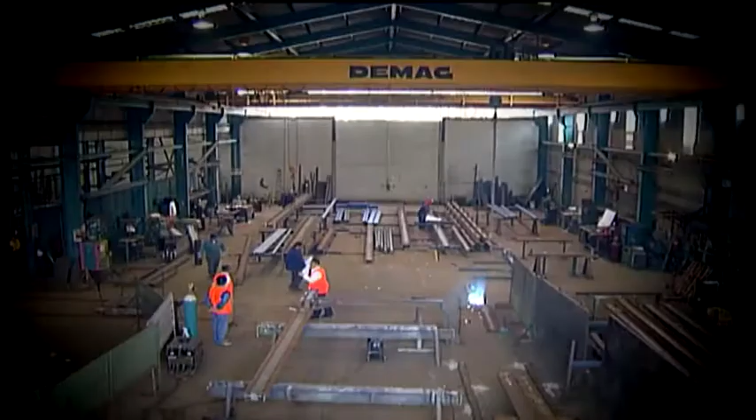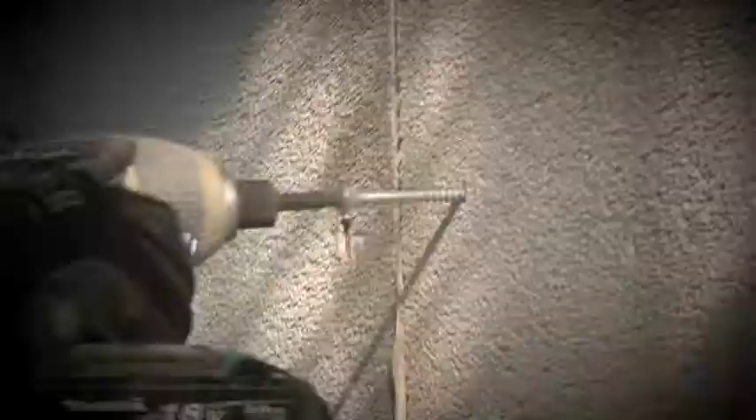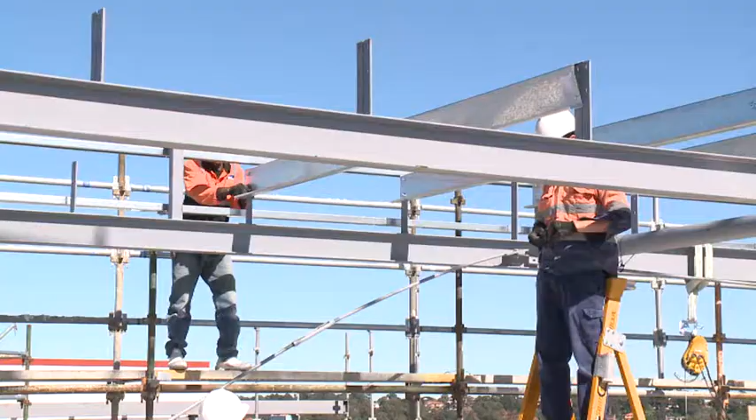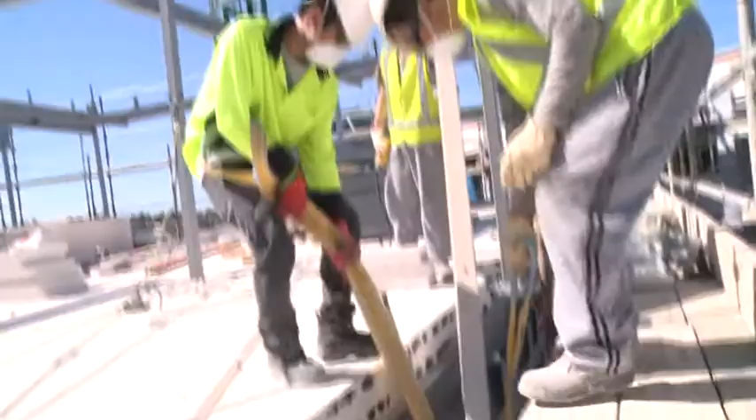The patented Merhes building system comprises a method of construction using a prefabricated structural steel framework with preformed autoclaved aerated concrete panels supported contiguously to form the structural floor and wall between supporting steel frame elements in a building.

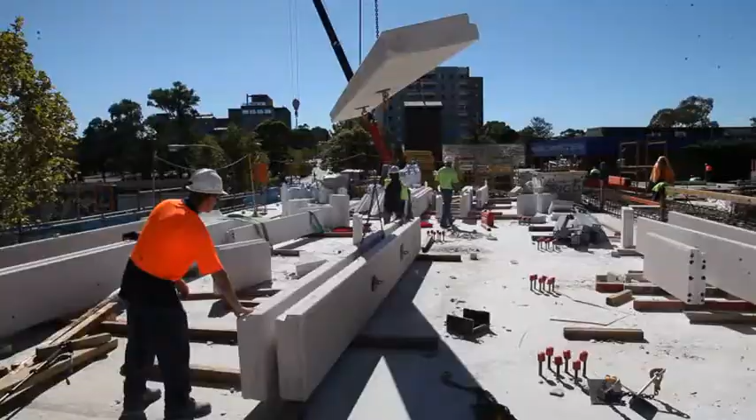The panels are delivered to site with preformed lifting holes to enable secure crane lifting singularly or in multiple panels in series by means of the respective lifting holes to enable simultaneous lifting of up to 5 panels.

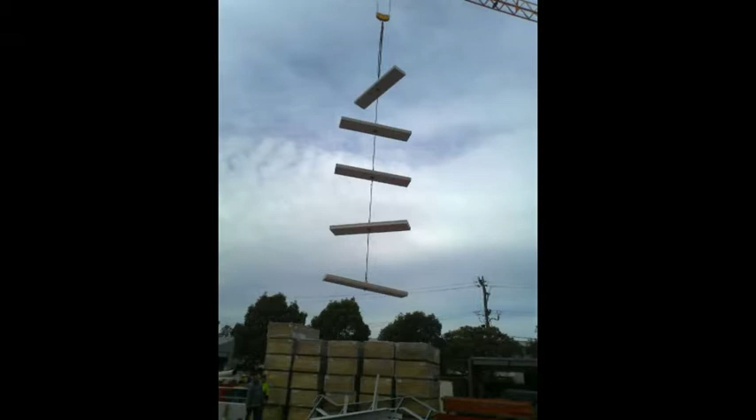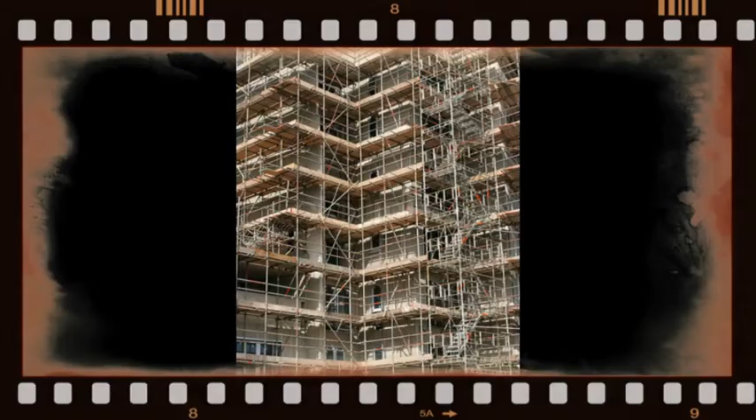Contemporary multi-level construction typically involves the construction of a reinforced concrete structural core formed with the floors cast level by level, followed by erection of external walls tied into the structure.

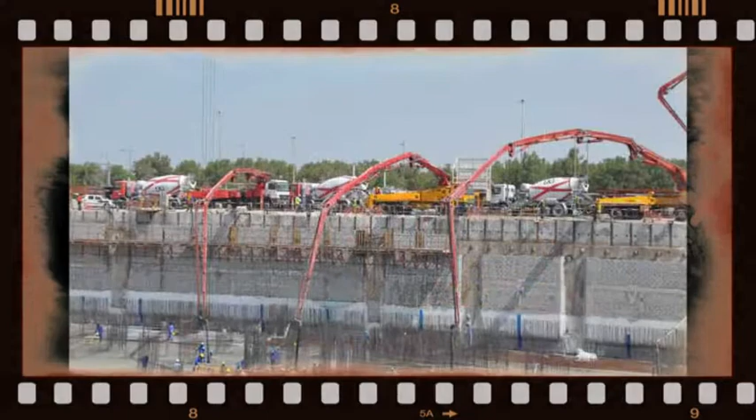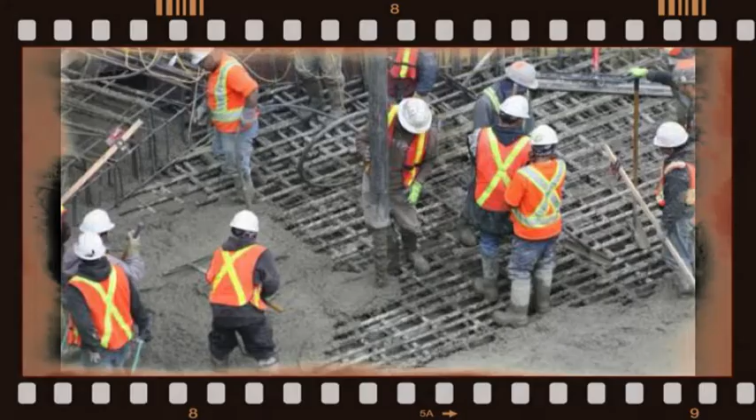The process for constructing these concrete elements involves the fabrication of a complex formwork system, the placement of reinforcing bars with associated support props before the concrete is pumped and placed into each section and is allowed to cure until it gains sufficient strength. The formwork and props must then be removed before the internal elements and finishing works can proceed. This method of construction has proven to suffer from a number of significant and inherent disadvantages.

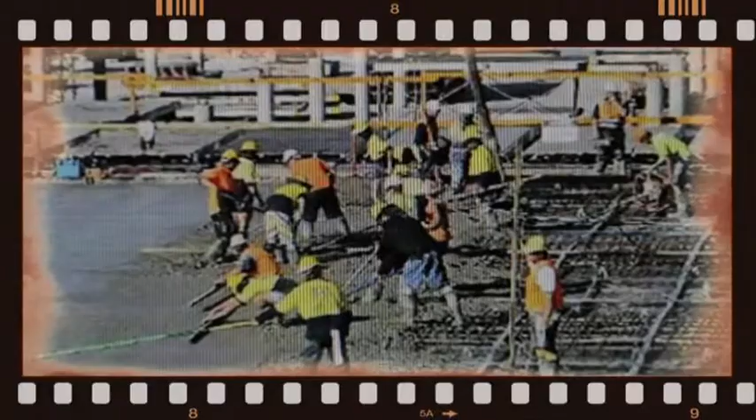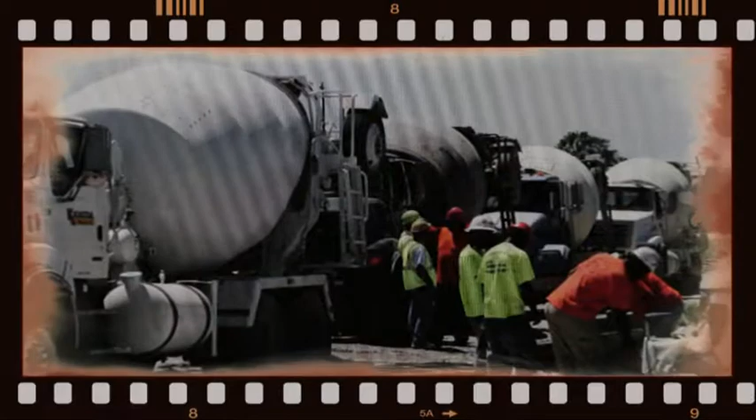Firstly, a large number of separate trades are required to implement the highly labour-intensive process that must be carefully coordinated. The overall process is inherently slow. In the context of a high-rise building development, the cumulative time required can amount to many months, at an economic cost of many millions of dollars for a single construction project to both the builder and developer.

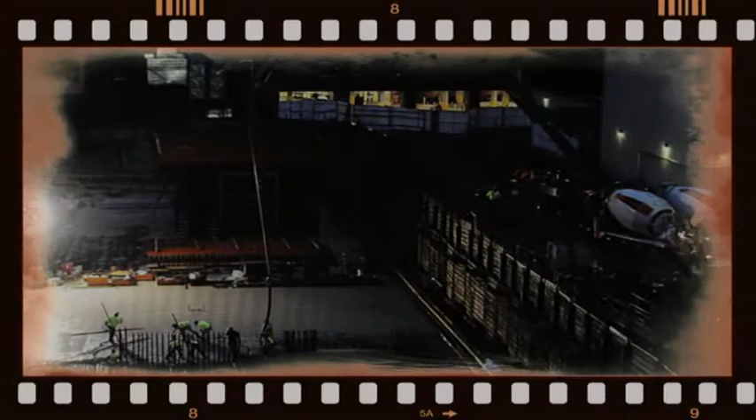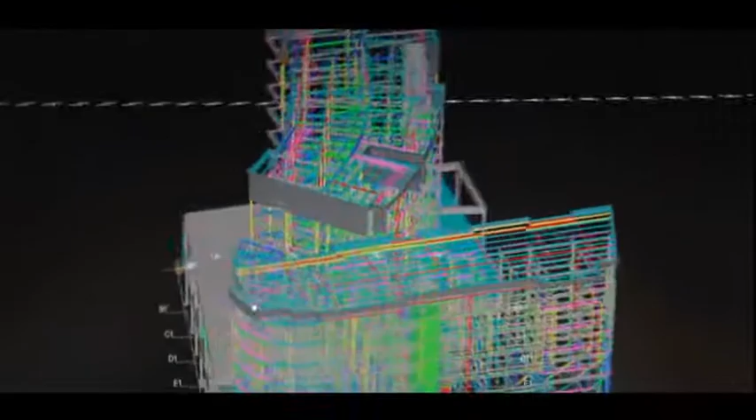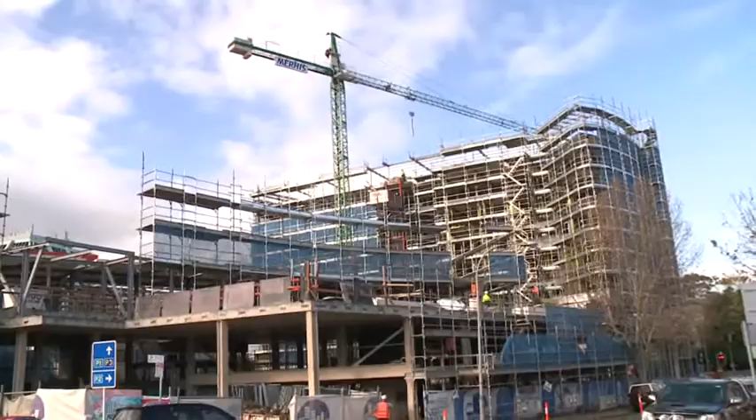The Merhis building system is primarily devised to overcome and substantially ameliorate the deficiencies of the traditional method of construction and to provide an alternative form of construction for multi-level residential apartment buildings, retail shopping complexes, hotels, high-rise office blocks, schools, hospitals, and other forms of commercial and industrial complexes.

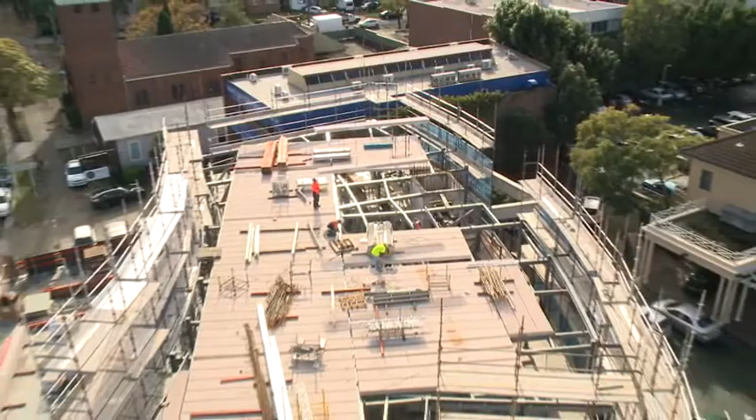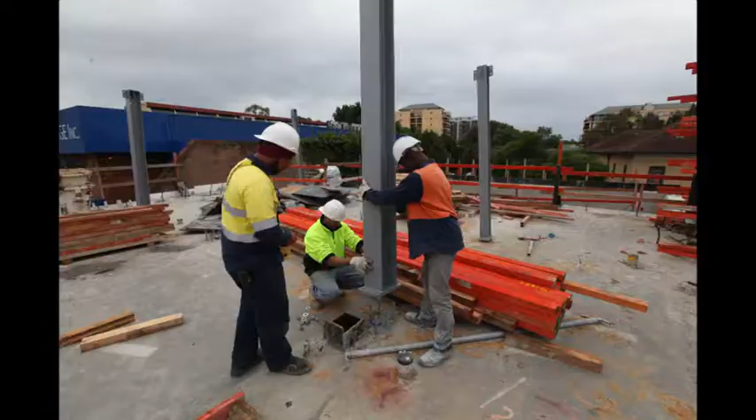It comprises a method of constructing a building by: 1. Erecting a series of vertical and horizontal support steel columns and beams that are bolted, welded or otherwise fastened together, either on site or delivered to site as a prefabricated structural subassembly. 2. Positioning prefabricated structural panels comprised of a reinforced autoclaved aerated concrete material that are placed in a side-by-side relationship to form a structural floor and wall.

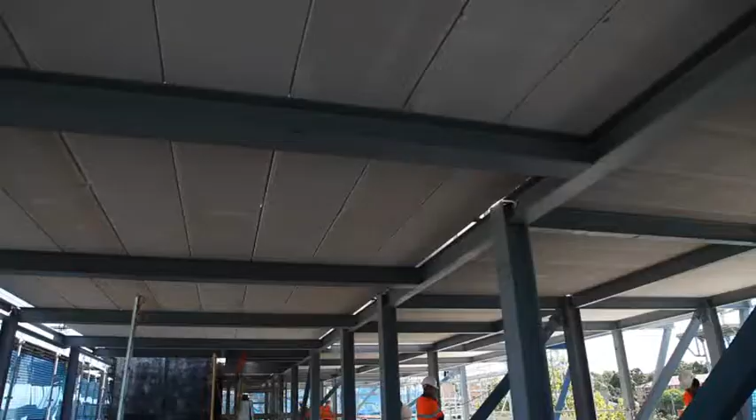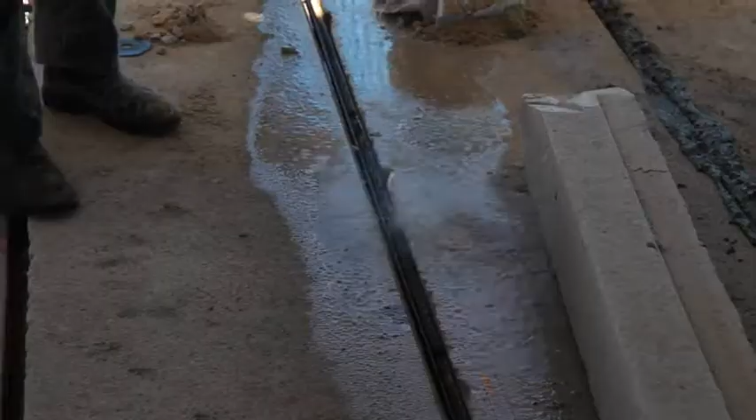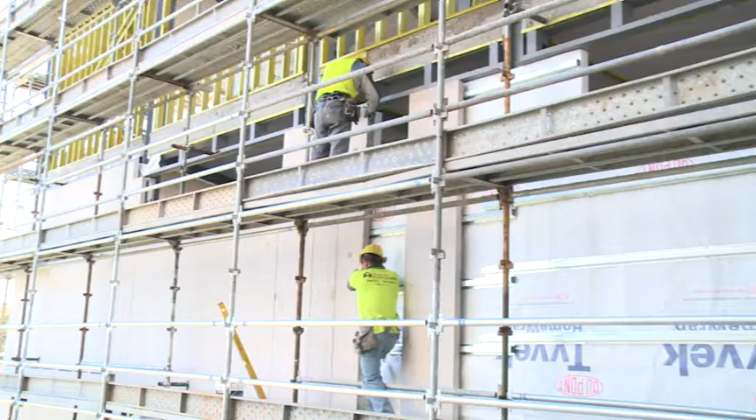The spaces between adjacent edges of respective floor panels are tied together by reinforcing bars placed longitudinally in the channel. The channel is then grouted to form the seamless structural floor. The external wall panels are similarly positioned side by side to form a wall section extending between or adjacent the structural columns and beams.

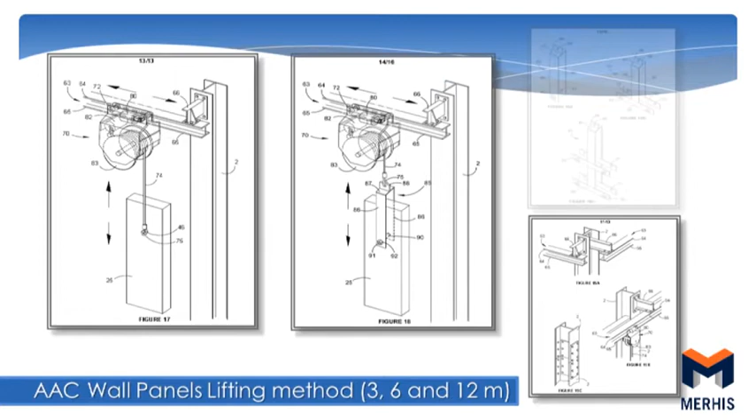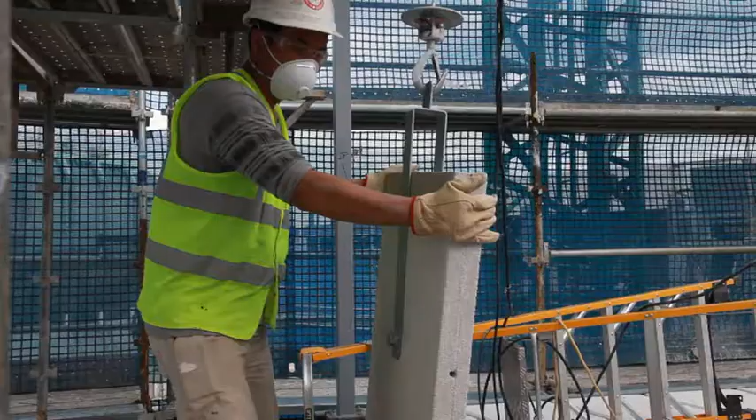The floor and wall panel is hoisted into position utilizing a single centrally located preformed lifting hole and lifting attachments to facilitate the lifting of the panels to the appropriate floor level in the building structure. Depending upon the size and weight of the panels, multiple lifting holes and associated lifting attachments and linking elements may be used.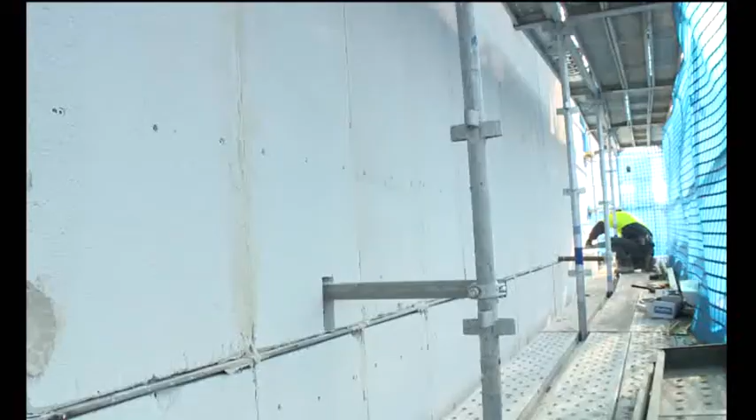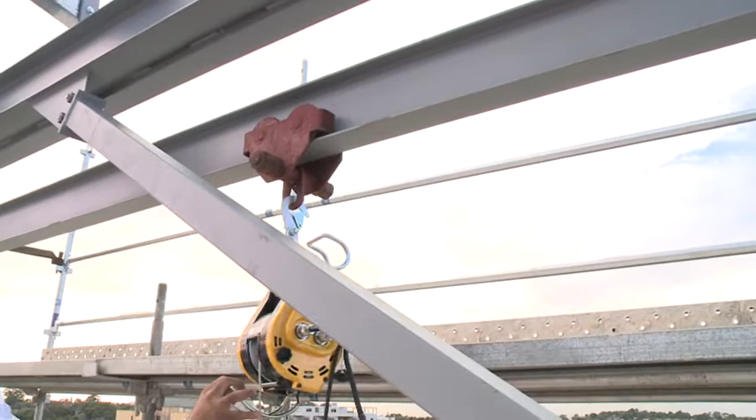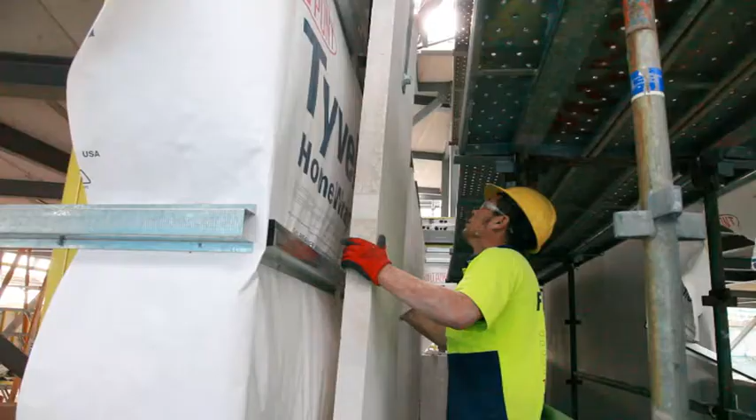The lifting formation includes an eye bolt having a head with an integral lifting eye, engaging a mechanism on the motorized carriage assembly of a wire rope, cable or chain, terminating in a hook formation on a rail traversing mechanism with guide wheels rolling on the lower flange of the I-beam to progressively raise and lower the suspended panel by remote control.

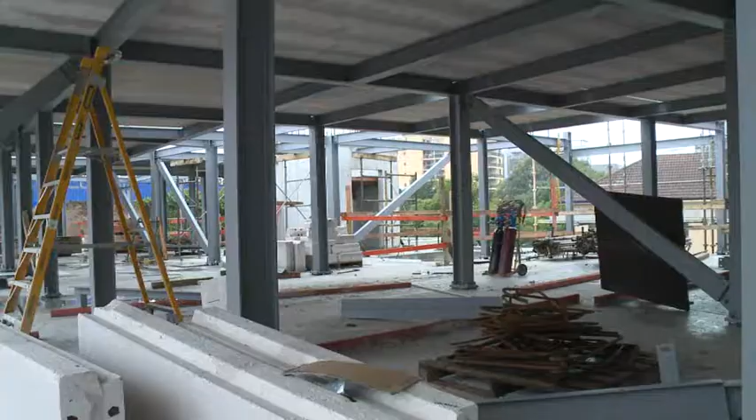A typical building project using conventional techniques would usually require around 60 to 100 workers on site. By contrast, a comparable building project optimized and constructed in accordance with the Merhis building system may typically only require 8 to 10 workers during the corresponding construction phase.

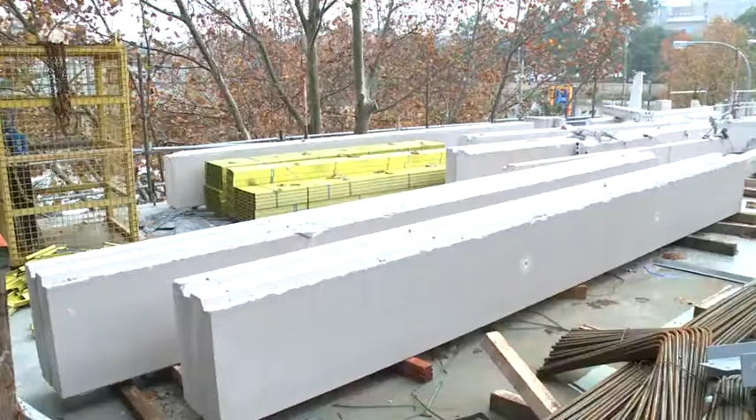There is a significant reduction in weight of the building structure through the use of the structural steel framework and AAC structural panels, which produce flooring or walling that is substantially lighter than an equivalent area of conventional reinforced concrete, which contributes to further cost savings in terms of both material utilization and construction time.

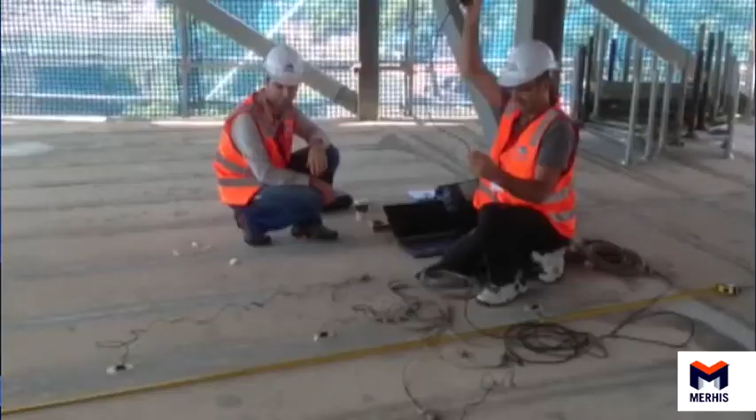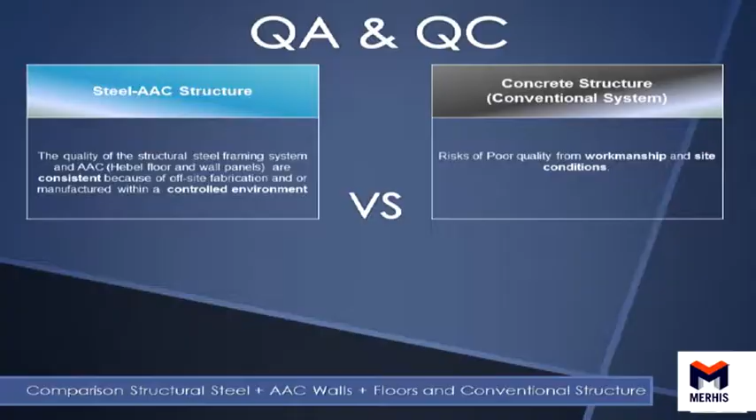The independent quantity surveying firm Heymann-Cohen was commissioned to produce a structural costs comparison report for a 9-storey residential apartment block at Rosehill, Sydney, that states in their conclusion that there is no doubt that the Merhis building system delivers a far superior end product from a multiple point of view. The financial benefits alone make the Merhis building system an extremely strong candidate as an alternative building system to the more conventional concrete framed structure.

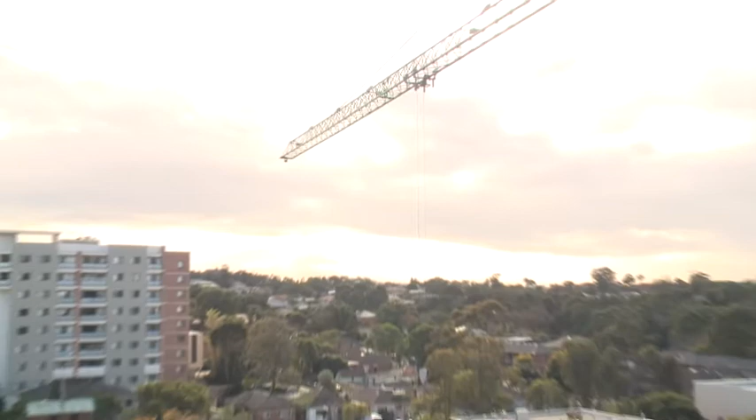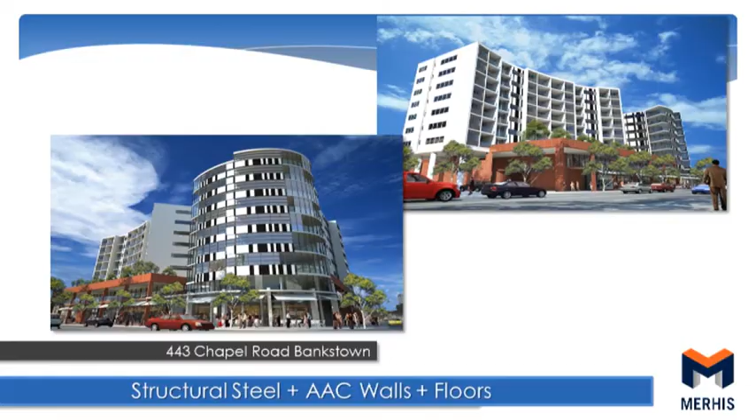The Merhis building system is a superior building system that delivers financial, time-saving and a multitude of other benefits that cannot be achieved using conventional building methods. It can be seen from the report that there are potential cost savings of up to 13.7% of the construction costs to the builder and a massive saving of up to 28 to 30% of the construction costs to the developer builder.